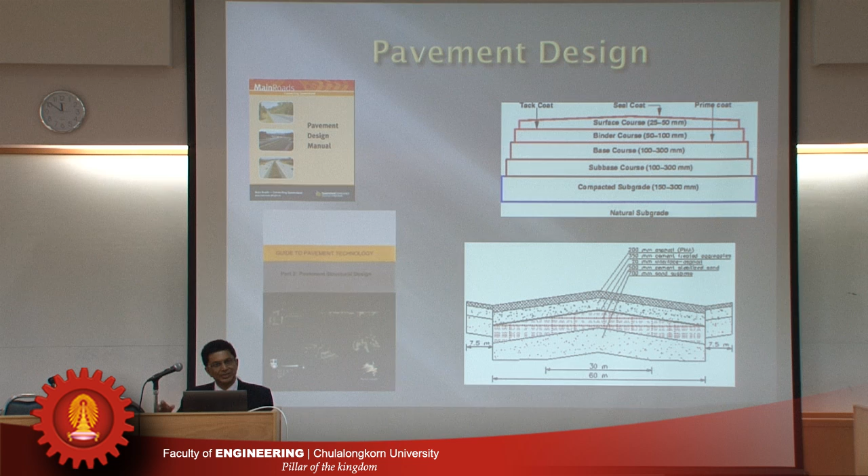So pavement designs, pavement materials, construction techniques, and the management. I'm talking mostly about the management after the construction. So these are the other areas where I just wanted to highlight. We are not neglecting this one. We have to think about pavement materials, construction method techniques, quality management, the aggregates, things like that, and also project management.

I know some cases in Sri Lanka recently happened, one bridge collapsed before its opening. Then we looked at what's the reason. Design is perfect, but construction sequence was wrong. When the shuttering is removed, it collapsed straight away. So we have to be very careful.

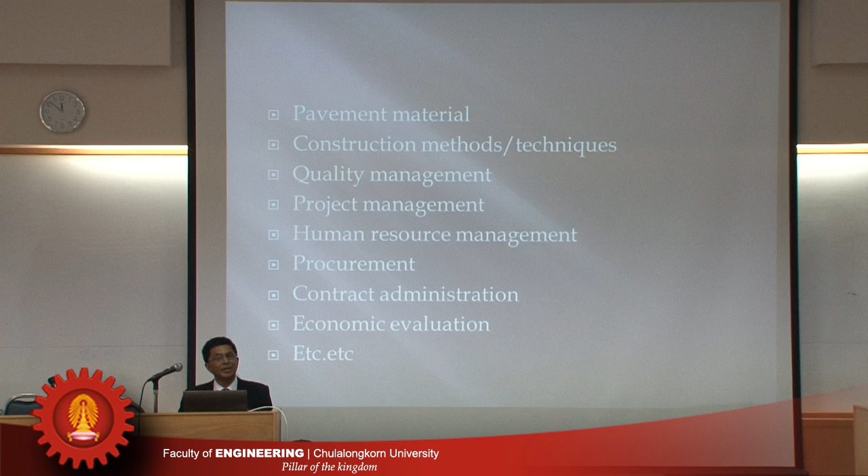Then other things like human resource management, procurement, contract administration, economic evaluation. These are important aspects. One more thing in this area I just wanted to highlight, it's about overloading. I heard there are issues in Thailand.

And also enforcement, so many things are there, education, enforcement, all kinds of things can be done, but I just wanted to highlight this is a big issue in most of the countries, but not in Australia.

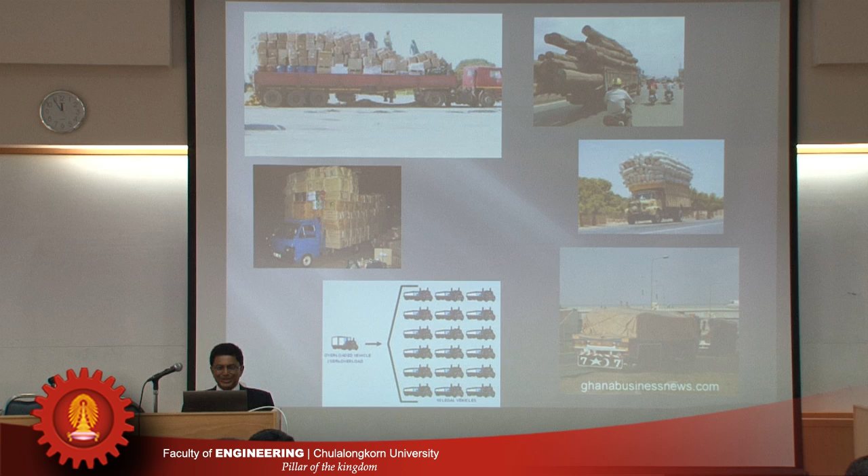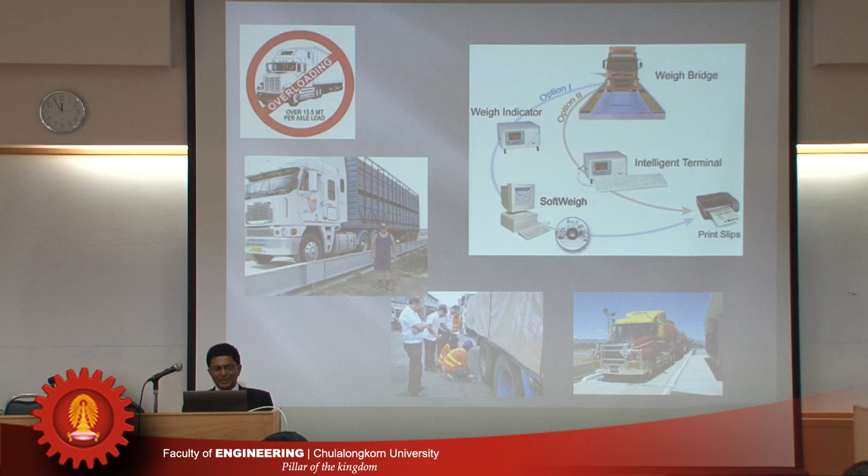So overloading management, I put these slides, how to manage your weighing bridge. Then you can computerize and you can find if you want. Otherwise, you can educate and do certain things. There are so many procedures to manage that one. This diagram I just wanted to highlight.

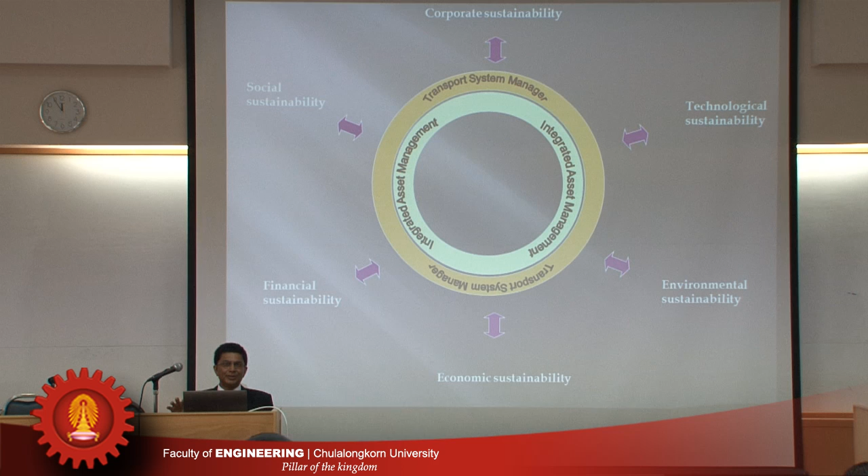This is called the Sustainable Asset Management Cycle. I developed this one, it's at a research level in University of Swinburne. Under this particular diagram, actually this is IP to me, I developed this one. So normally we manage with thinking about three things: social, economic, and environment.

This is called the triple bottom line. These are the three things we are optimizing in any investment. But I bring from the government sector point of view three more things. We have to have corporate sustainability. Corporate sustainability means the people have to be there. Without properly trained people, we cannot do it. So we have to consistently manage our knowledge and capacity. So that's what I had to bring.

Then the technological sustainability. This is again, the world is going very fast. If you don't adopt new things, we are losing a lot of money, a lot of investment. So Tops mentioned about how we are doing in Thailand, how other countries do it, but I am not telling that we should adapt straight away. But if it is suitable for your country, you have to adapt. If there's a good technology there, why not? Don't think, oh, that's not going to be used for us. But if it is suitable for your country, you can use it.

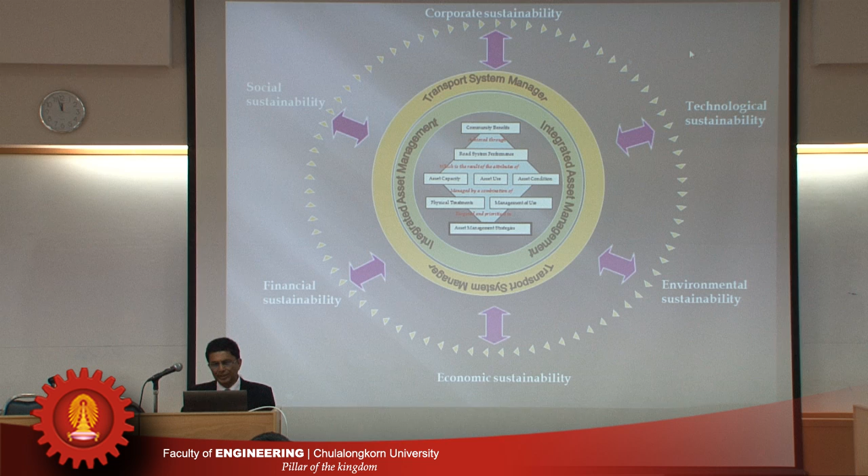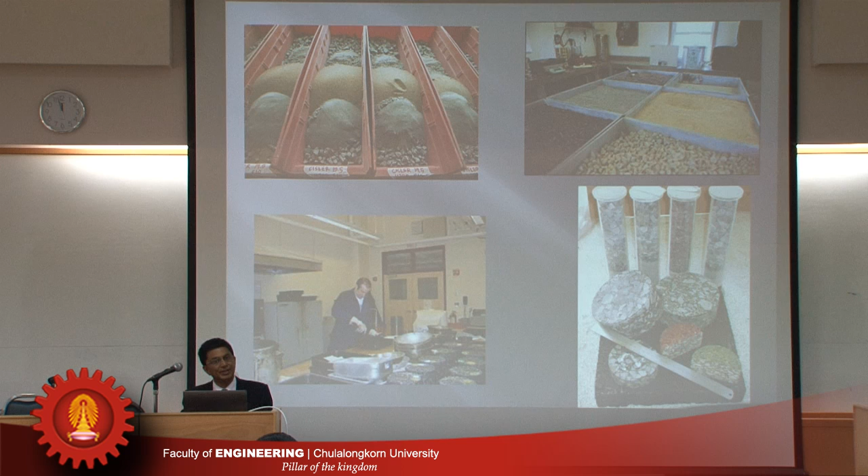Research and development. Now I'll come to the research and development in pavement design, in the asset management area. I'll give a rationale for R&D. This is interesting for research people and also for working with the road authorities.

My way of thinking is R&D should be strategically driven. R&D probably doesn't give results from tomorrow. It will take a long time to get good results, but they will be good results. So you have to think long term rather than short term when you invest in R&D.

Linkage and alignment: most R&D projects have to be linked with the road authorities' interest. Some universities and researchers do research for the sake of research, but I think that won't be supported by road authorities. If your research work is aligned to the road authority, I think they will support you. So you have to think about this.

So Main Roads, my work organization, these are the rationale. This is the reason we are doing it.

Then the last one, again I am coming back to partnerships and collaborations. Without this, it's pointless to invest in research and development. We don't have all the skills by ourselves. There are different people who have different skills. We can bring it together and work together to achieve a better outcome.

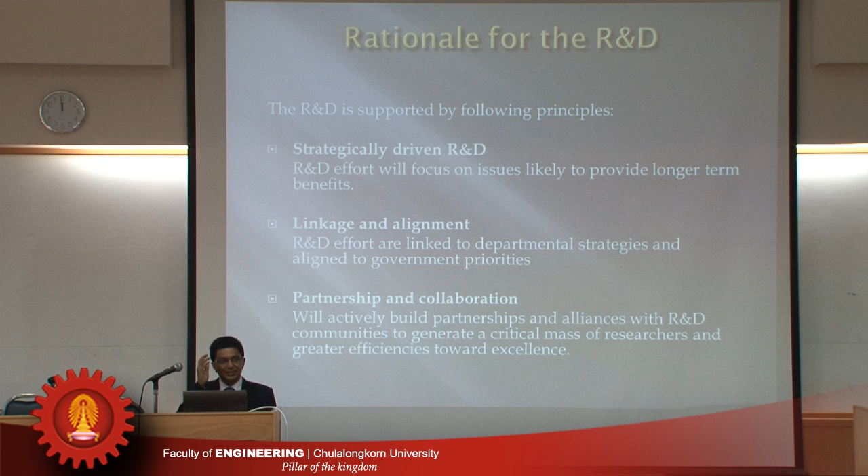Now what TOPS is trying to do, what this organization is trying to do, is exactly that: bring all the knowledge from various people together and achieve one common objective - improve the systems, improve the economic situation, improve the investment, that kind of stuff.

So I just wanted to talk about a few past projects about what we have done. I am not going through detail on this, just highlighting a few: optimum interval for asset data collection, risk-based model for pavement management system.

This was some time back, about 7 years ago. During that time we hadn't had the traffic speed deflectometer running at 100 km per hour, because we wanted a very cost-effective data collection policy. So we wanted to figure out how to invest in that. That's the first one, and it was actually done by a Thai person.

Now he is here, his name is Dr. Peerapong. He worked for me at that time in Australia. He is really good.

Then we did what's called seasonal characteristics of pavement strength. Everybody knows pavement strength is not constant - it changes every time. When the rainy period comes, it drops; when the dry period comes again, it improves. So we have to understand these changes.

So we did some research on that and developed curves for it. We monitored one 30-kilometer section for 2 years, every month, 24 readings at each point.

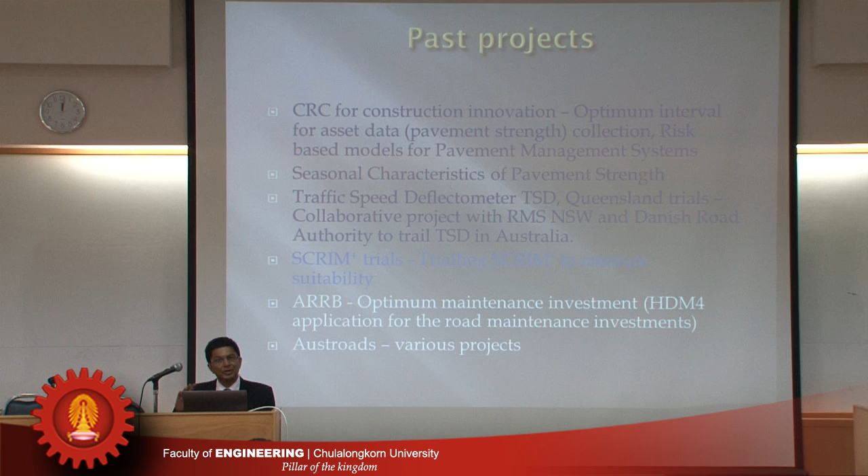So that's done. Then the traffic speed deflectometer - this was developed in Denmark, as I mentioned. We don't know whether it's suitable for Australia. Australian conditions are completely different, because European roads are very smooth and asphalt-based, but our rural roads are very bumpy and rough because they are low volume roads.

So how does the roughness affect the readings? We tried to figure out how that works. That's what I spent about $500,000 on for data collection.

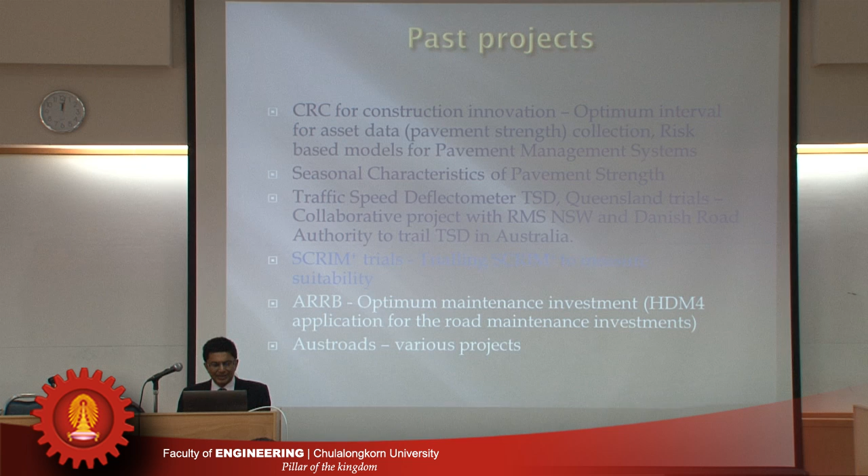Then SCRIM+, as I mentioned, and there are a few other pavement-related projects, but current research is going into skid resistance decision support modeling based on data mining for managing skid resistance.

This is one of the groundbreaking methods we are using. We have millions of data points. As engineers, we normally go and work with an Excel spreadsheet - no, that's impossible sometimes. TSD data produces 50,000 points for 1 kilometer, and we have 5,000 kilometers of data. How do you do the analysis?

We cannot with Excel, but we have a technology now called data mining, which is really good. We have actually been doing this for the last 4 years, very successfully.

Then we have identification of the relationship between skid resistance and PAFV values. This is industry driven - the people who develop asphalt actually fund us to investigate. These are the kind of research investments coming to us, because once you establish yourself as a good research organization, funds will come through various avenues. So you have to think about this.

Anyway, there are a number of projects - I am funding PhD students, so it's a different kind of investment. You do some of the research yourself, some things we give to universities, and some things we fund for research students.

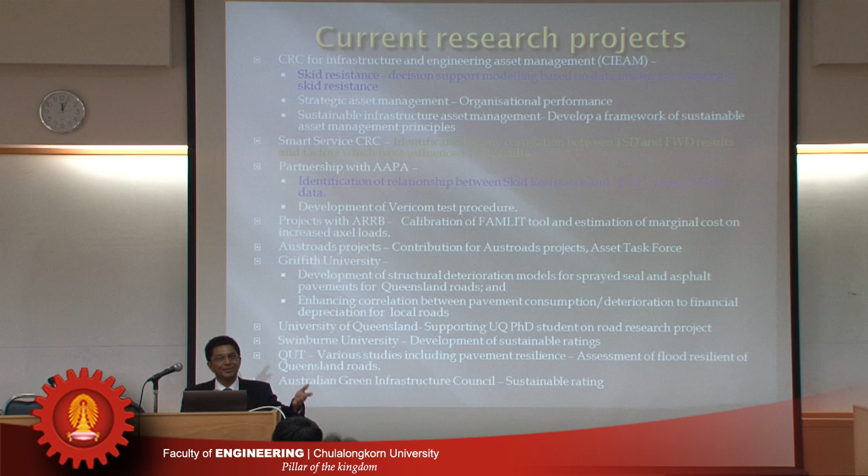It's dependent upon the requirement. You cannot stick to one method of research. Various methods are there. I am just highlighting this one to understand.

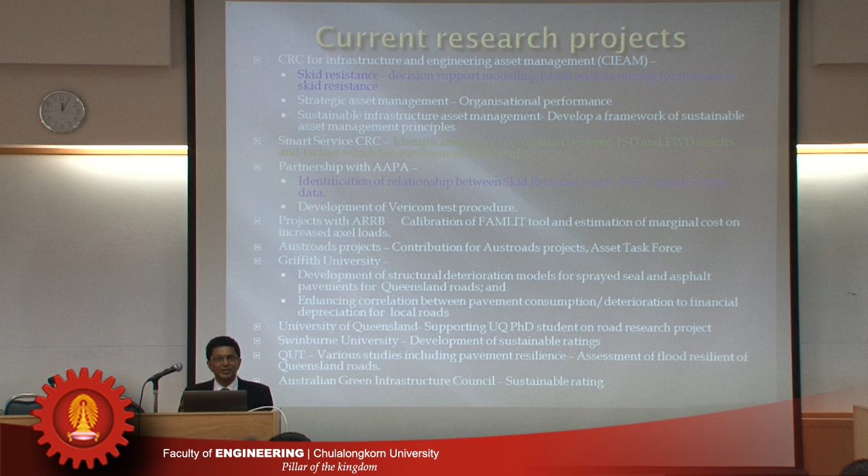We are also doing a lot of research about sustainability, how a sustainable rating can be implemented. This is a buzzword in the world now, sustainability. Everyone is talking about sustainability. The roads also have to be sustainable.

You have to work along with that because of climate change and things like that. There's a few projects we are heading toward in the future, coming through the current situation. We had floods recently in Queensland, just a 100-year flood, and all roads had damage. Now, this happened again within 2 years - another 100-year flood.

So normally 100 years to come, but within 2 years, a 200-year flood came. How do you design for that? Road engineers should understand road pavement resilience. We are starting research on that. You have to think about it yourself - if you have a 100-year to 200-year flood, how does our pavement survive? Is there any way of doing that? These are the areas where you could think about research.

Also, low volume roads under the prevailing financial circumstances - we don't have enough funds to maintain the whole road network. We are doing research on that as well, how to overcome that situation. It's a good topic we never thought about before. Then we can make the best investment on that. So these are the few pipeline projects we have.

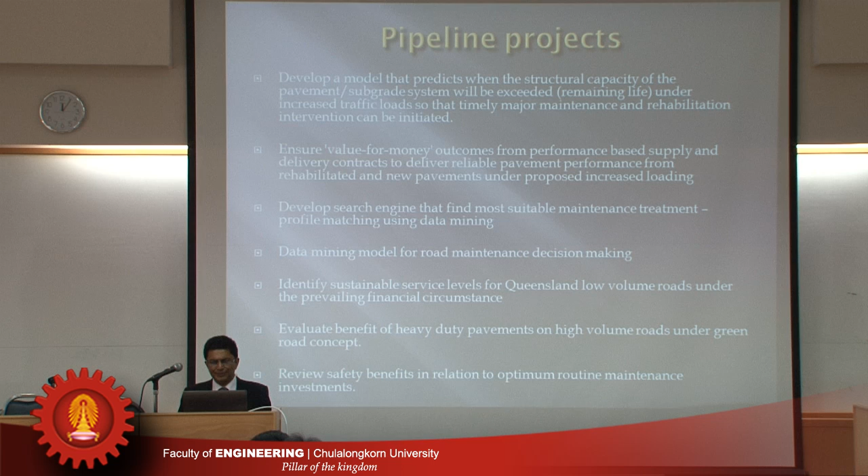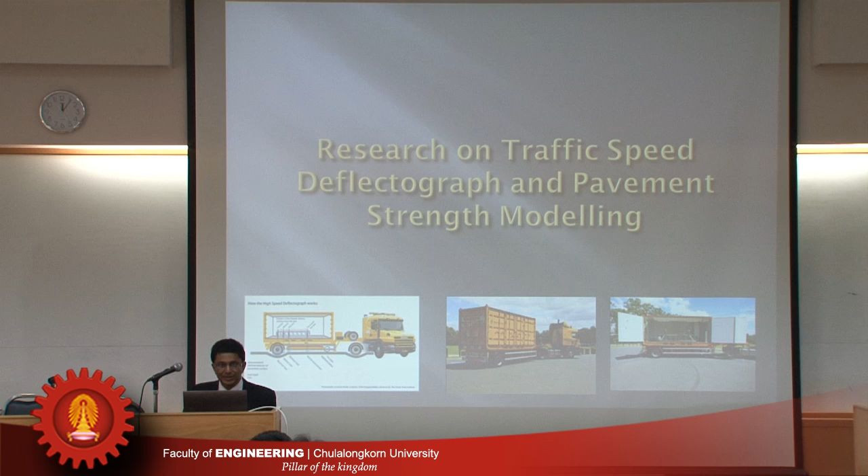Justin, if you think some part is very important to you, you can explain. If you cannot finish by 12:30, you can continue in the afternoon part. What we can do now is go through quickly, and if I have time I'll come back and show that video - that's a good idea. Right? Yep, the video isn't set up here as well.

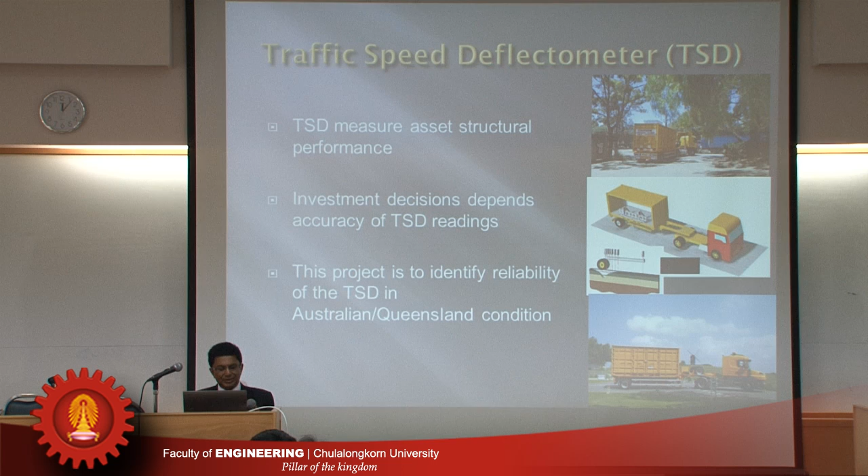So this is the equipment, and this is the network we have done - 5,000 kilometers of road network. There are about 6 test sites where we have done repeat work for 3-4 times in the same section. Other sections are one run.

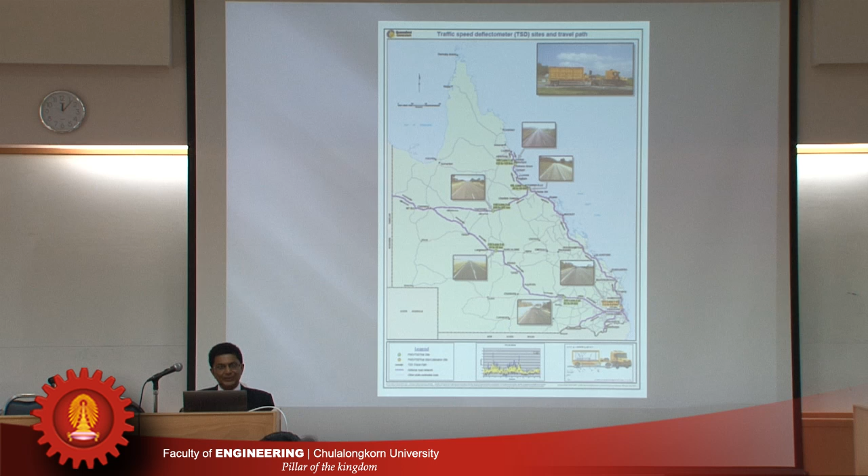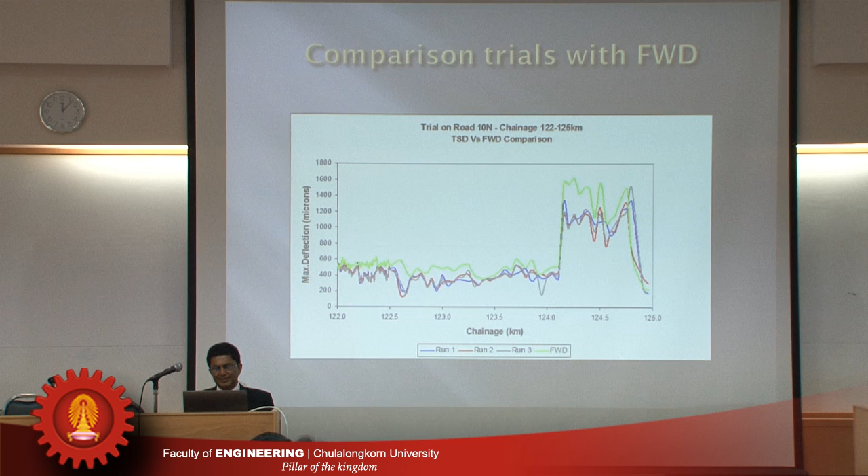Some of the comparison results are like this - this is a very simple analysis, an Excel spreadsheet. Then we have what's called long-term repeatability. After a couple of months we came back to the network and did about 35 kilometers again, to see whether it gives the same results as previously.

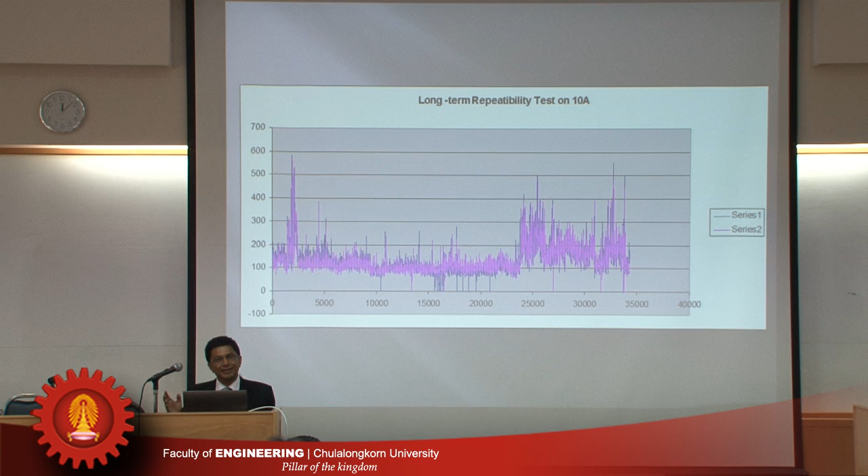At the same time, we have gone to university level - that's been done in my office. As engineers, we can do this kind of simple analysis; we don't have to spend too much time on it. But when you go to very theoretical, sophisticated, technical analysis, we cannot do it - we don't have the time.

So I went to university and asked how to compare these two data sets. They suggested wavelet theory. Have you heard of wavelet theory? The two equipment sets give data at different intervals - you cannot compare them directly. But this methodology converts the data sets into waves, then we compare the two waves for similarity. It's called wavelet theory, and I did a presentation recently at our conference on this.

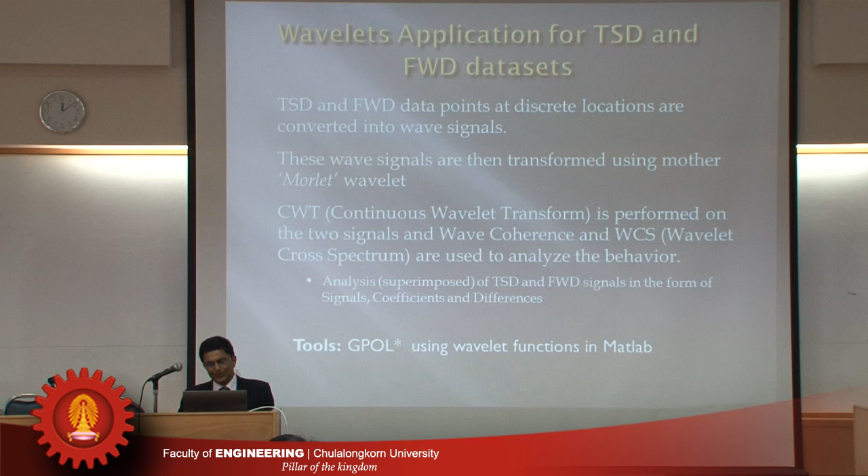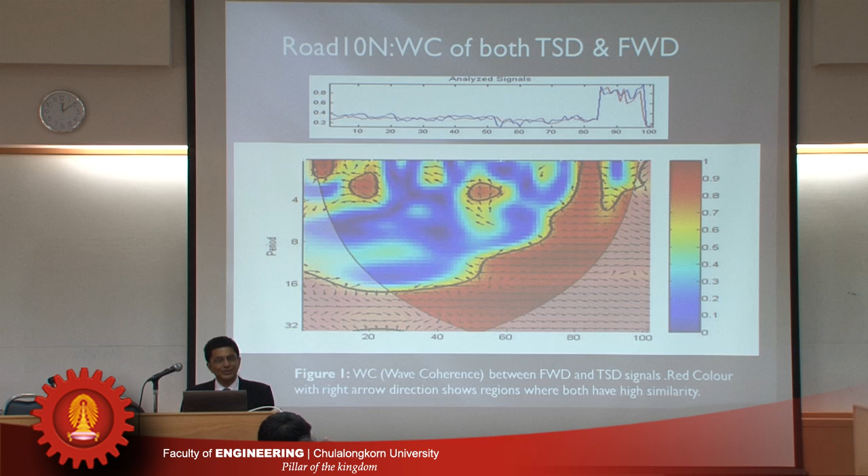So there are new technologies we have to use. When you think about research and development - let me explain this more in Thai to the audience, because the technique just presented is very new to Thailand.